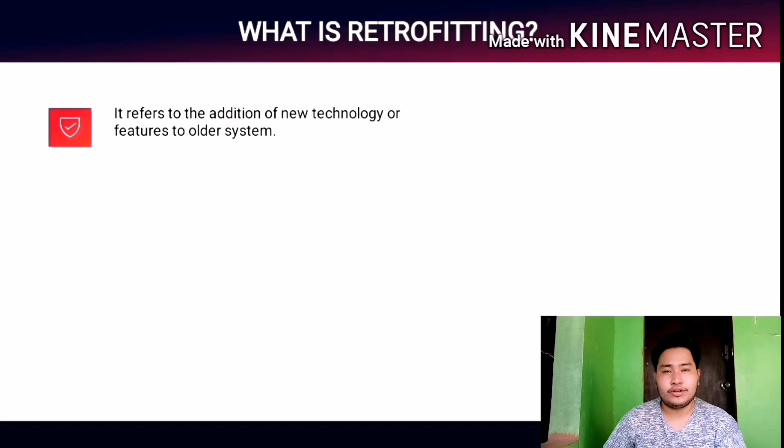Retrofit. Una, what is retrofit? It refers to the addition of new technology or features to older system. Pangalawa, retrofitting is a modification of existing structures to make them more resistant to seismic activity, ground motion, or soil failures due to earthquake.

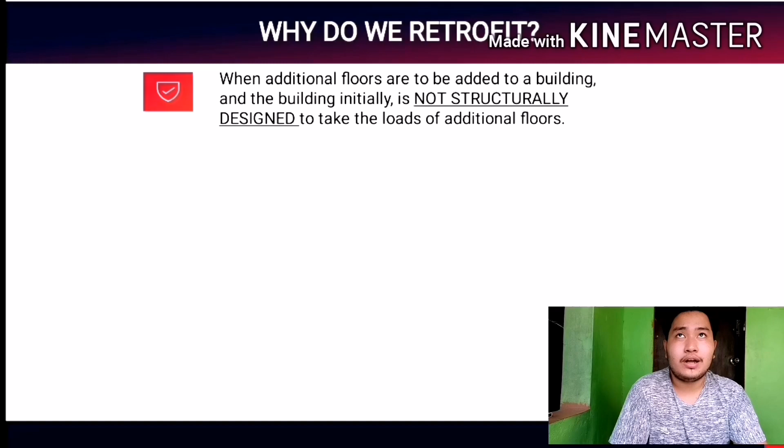Secondly, when the compressive strength of the column and the available reinforcement are not sufficient to carry the loads as per the available code provisions.

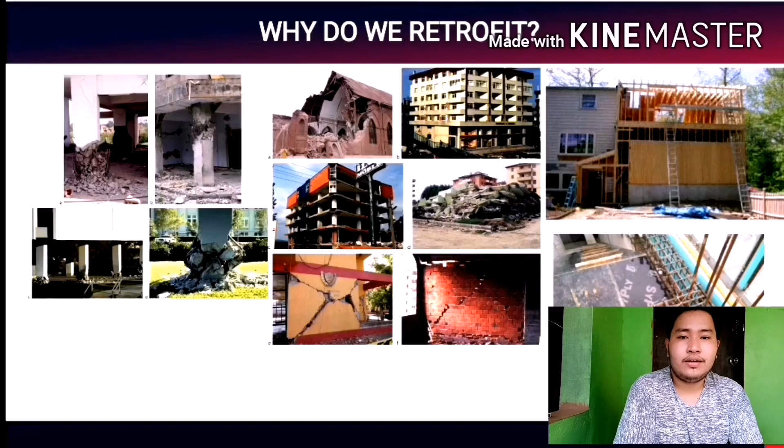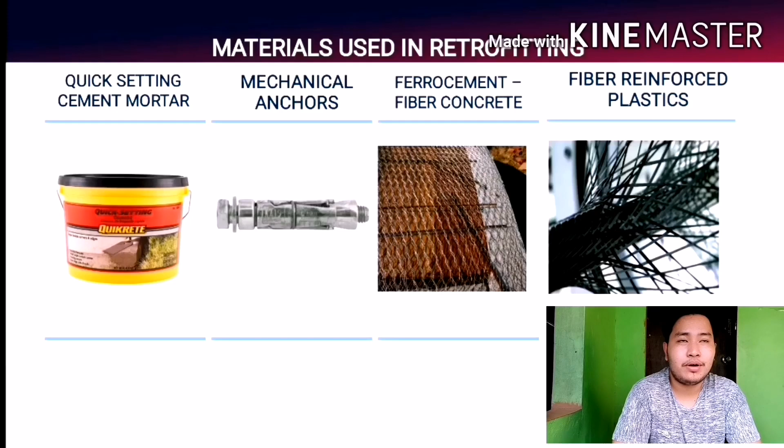Non-shrink grouts, shotcrete, epoxy resins, epoxy mortars, tapos meron din tayong quick setting cement mortar, mechanical anchors, ferrocement, fiber concrete, and fiber reinforced plastics. Yan, ngayon nakita natin yung ating mga materials used sa retrofitting.

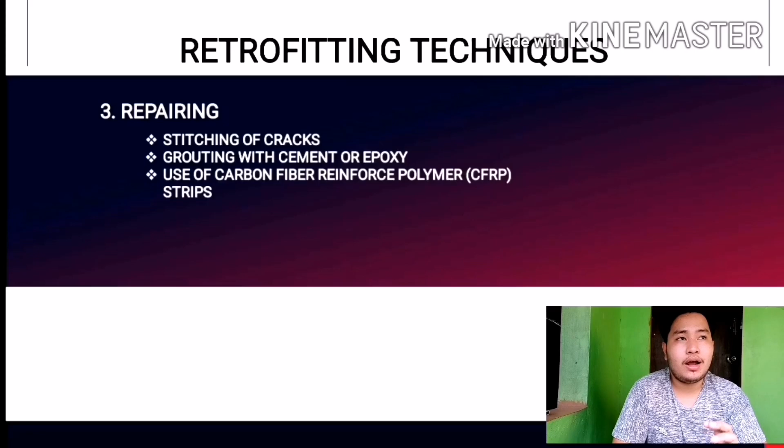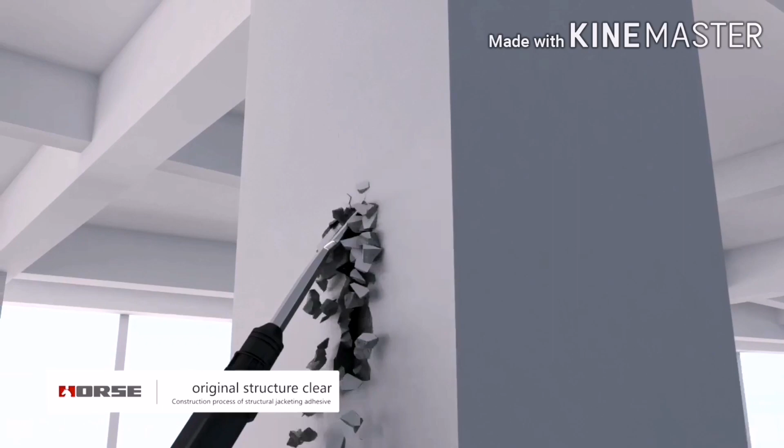Construction process of structural jacketing adhesive. Remove surface coating until concrete surface appears. Make it clear and sound. Grinding surface smooth and chamfer angles. Repair and level concrete defects with Horse repairing adhesive. Locate the setout according to the drawing. Grind and roughen adhering surface of angle bar and batten plate.

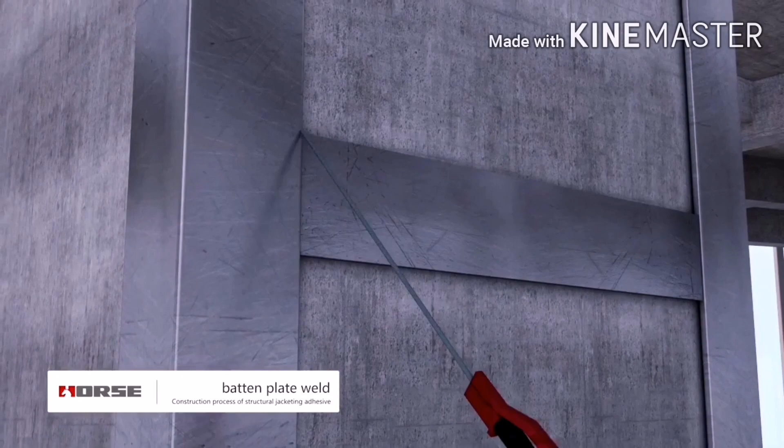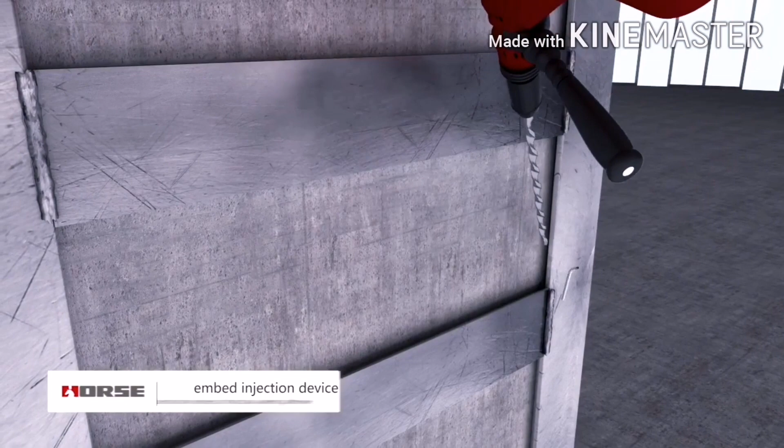Install gasket, clamp steel skeleton with special fixtures. Leave 2 to 3 millimeters gap between steel skeleton and original member. Weld batten plate and steel skeleton. Weld should be straight, uniform, no virtual welding, leakage welding. Embed injection nozzle and exhaust hole according to design. Seal gaps between angle bars and batten plates with Horse crack repair adhesive. After crack repair adhesive is cured, test pressure with air, and if there is leak, seal it in time.

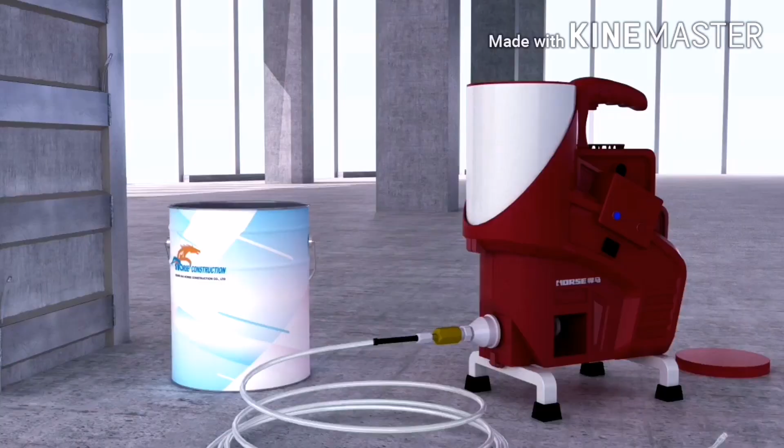Mix the Horse structural perfusion adhesive according to the ratio. Mix and stir evenly. Avoid bubbles. Do not mix too much adhesive at once to avoid waste. Inject Horse perfusion adhesive via injection nozzles with low pressure. Stop injecting when the adhesive appears in the near exhaust hole. Seal the exhaust hole and keep injecting adhesive with low pressure for 10 mins.

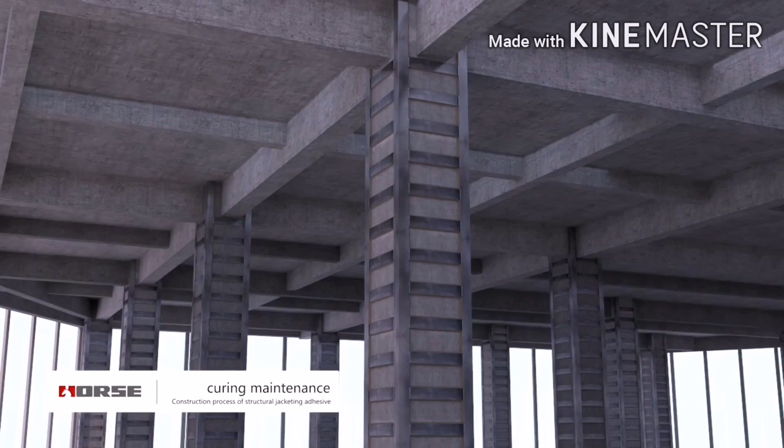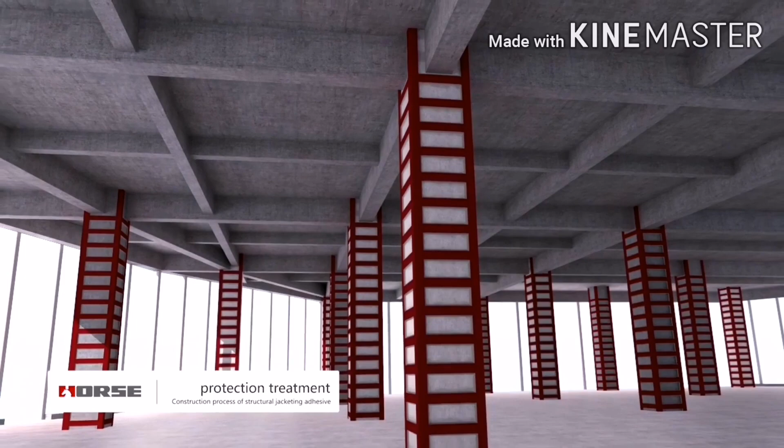After adhesive is cured, remove injection devices and extra adhesive. 72 hours curing and maintenance time is needed after injection construction. Check if there is hollowness after adhesive is cured. Finally, apply anti-corrosion and anti-fire coating. Horse Construction, high-end structural strengthening material specialist.

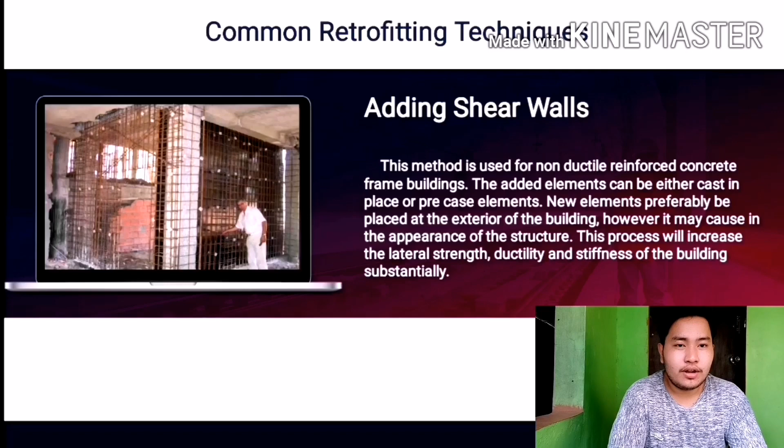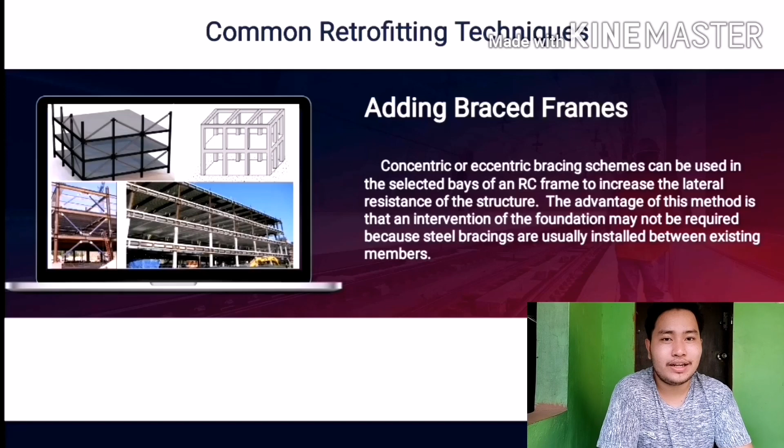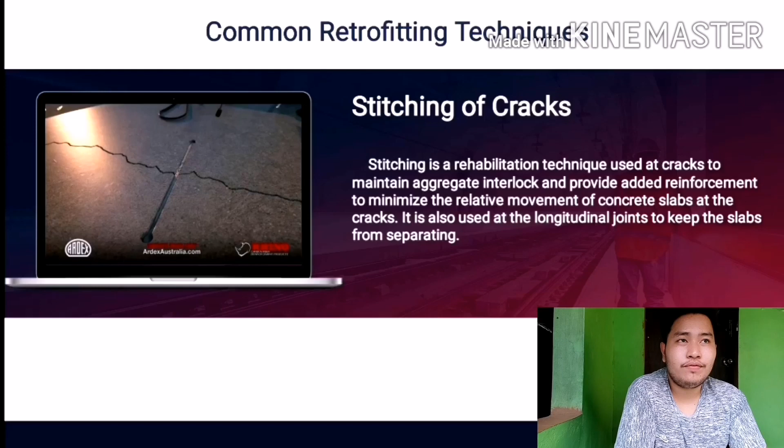Across the surface of the crack, ensuring it's smooth. Center the Rhino carbon fiber concrete crack lock over the crack and trace the outline. Always lay out the concrete crack locks roughly perpendicular to the crack. Vary the angle slightly to reinforce the crack in all directions. Then place the concrete crack locks every 200 to 300 millimeters, tracing the web and marking the ends.

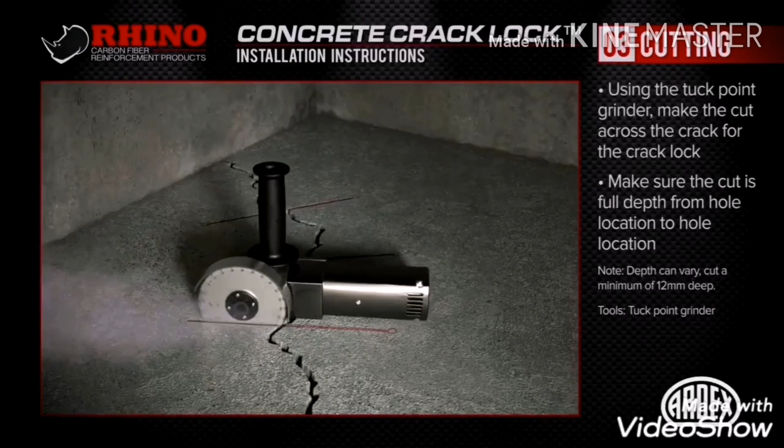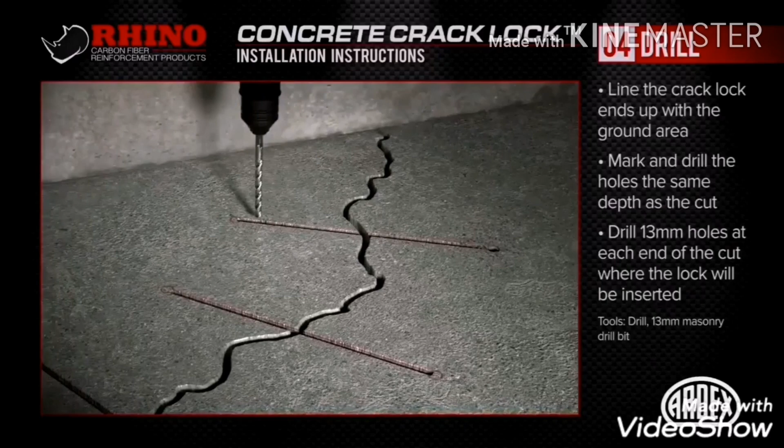Using a suitable tool with a diamond-tipped cutting blade, make the cuts across the crack. While the depth of the cut can vary, be sure to cut a minimum of 12 millimeters deep. Also, be sure the cut is full depth from end to end. Once the cutting is complete, drill holes at the ends with a 13 millimeter masonry bit, ensuring that they're properly spaced to accept the concrete crack locks.

Use an industrial vac or other appropriate method to remove all the loose debris and clean out the area. Also ensure that each concrete crack lock fits properly into each prepared area before applying any epoxy. Fill the cut and holes with one of the Ardex high-strength epoxy resins. Insert into the cut the stronger-than-steel Rhino carbon fiber concrete crack lock. Top off the cut with more epoxy resin until it's even with your concrete surface and scrape away any excess

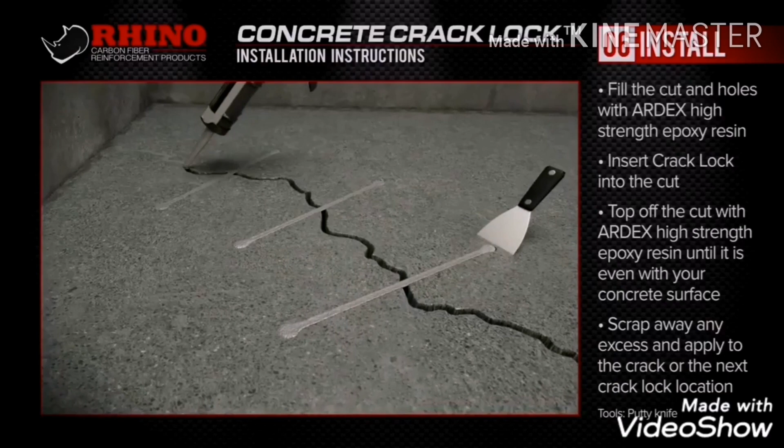epoxy. Apply it elsewhere on the crack or to the next crack lock location. Repeat as necessary. If the epoxy resin settles in the prepared area, you can add more to the cuts. And you can grind excess epoxy with your grinder once it is cured. You can also paint or seal over the repair after everything is dried and been...

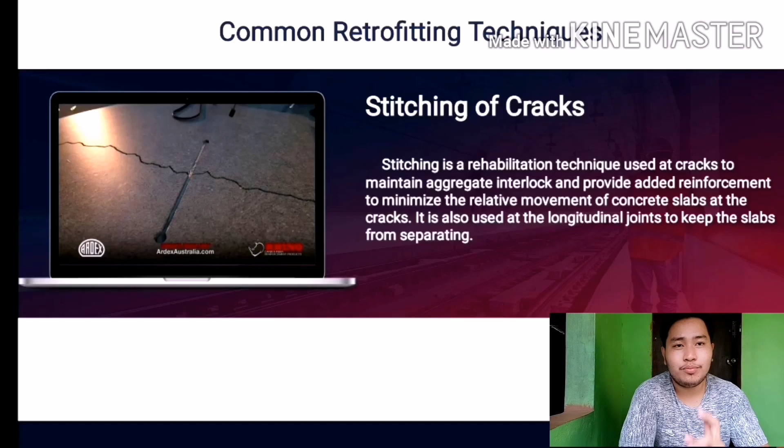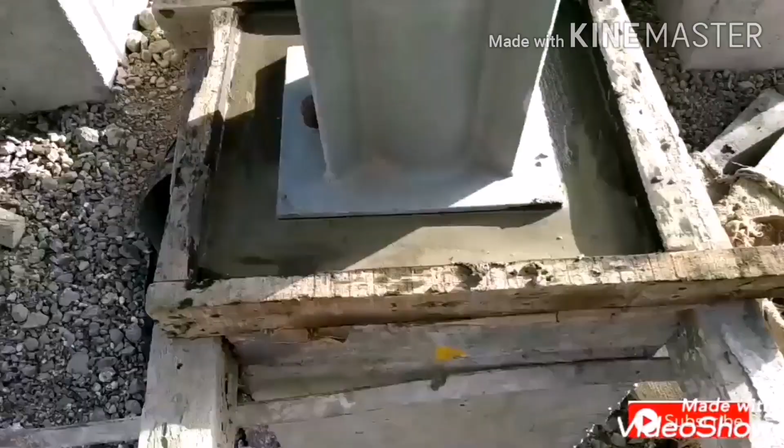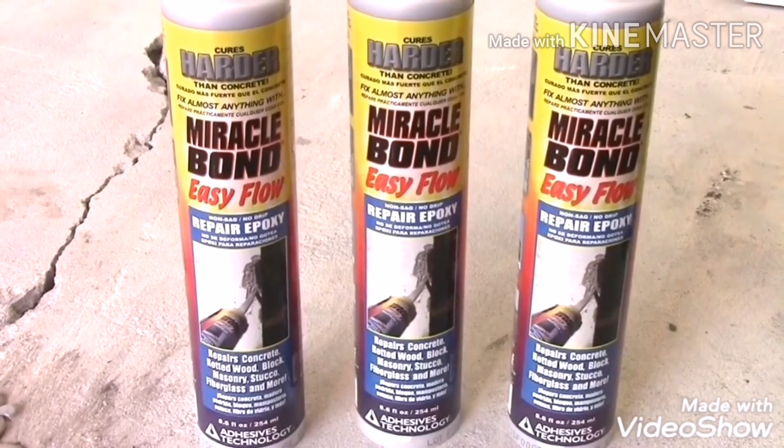Professional crack repairs utilizing structural injection techniques on this cracked concrete slab. Clean the crack using a wire brush. Vigorously clean the concrete surface surrounding the crack so the crack is not plugged with debris. Blow out the crack with compressed air. Miracle Bond would be used to seal the crack on the outside. This is also referred to as capping the crack.

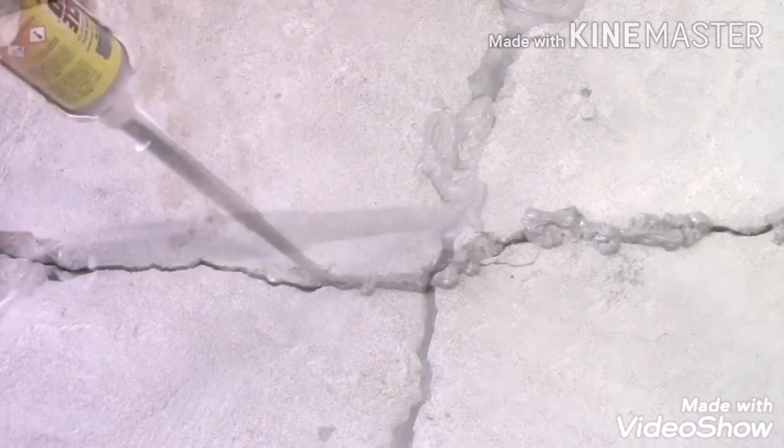Prepare the cartridge according to the label instructions and apply Miracle Bond over the crack, leaving spaces for the port installation. A standard rule of thumb is to place the ports 8 to 10 inches apart. Press the Miracle Bond in and smooth with a putty knife. Miracle Bond should be applied at least 1 to 2 inches wide along the length of the crack.

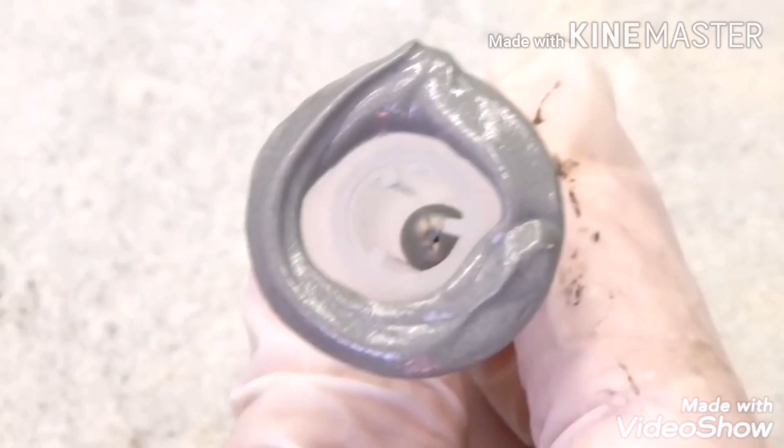Using a plastic putty knife, apply Miracle Bond underneath the outer half of the port base. Ensure that the port passageway is not obstructed or blocked when applying the epoxy. Center the port over the crack face in each gap and attach. Be sure to seal any pinholes or voids between the ports and the substrate being injected.

Allow Miracle Bond to fully cure prior to starting the injection. Keep in mind that epoxy cure rate is dependent on temperature. Attach the opposite end of the tubing tightly over the tip of the first port that needs to be injected. The flow clip should always be closed and only open while dispensing material. Start with the lowest port when injecting vertical cracks, or the widest part of the crack when injecting horizontal cracks.

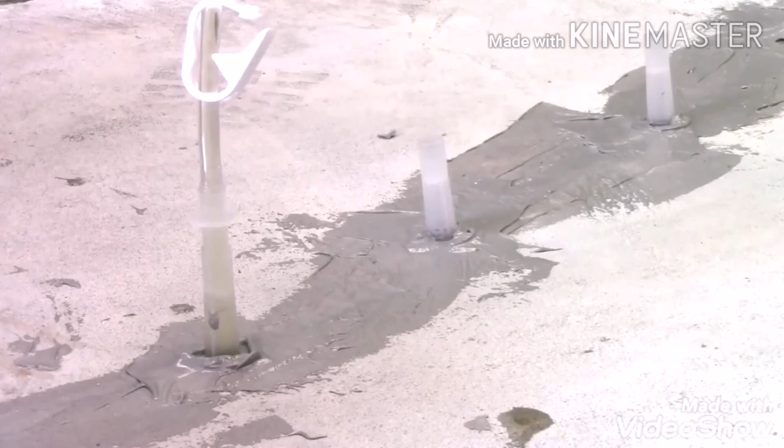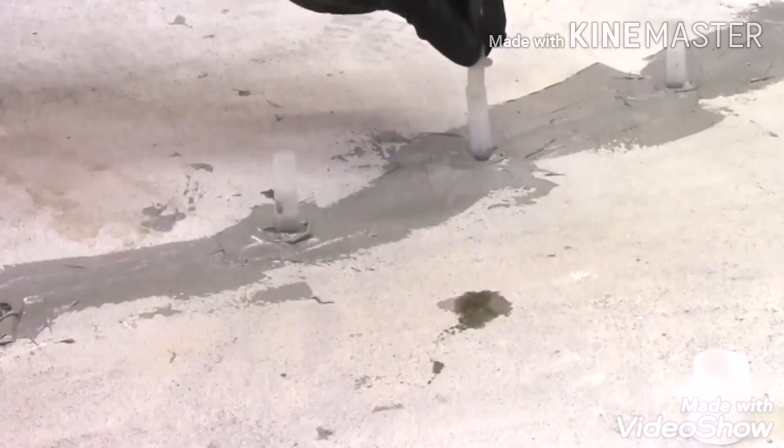Inject until epoxy reaches the next port. Remove the tubing adapter from the port and attach to the second port. Use the cap to plug the port. Begin injection at the second port and inject until the epoxy reaches the third port. Repeat until finished. After curing is complete, remove the ports with a hammer.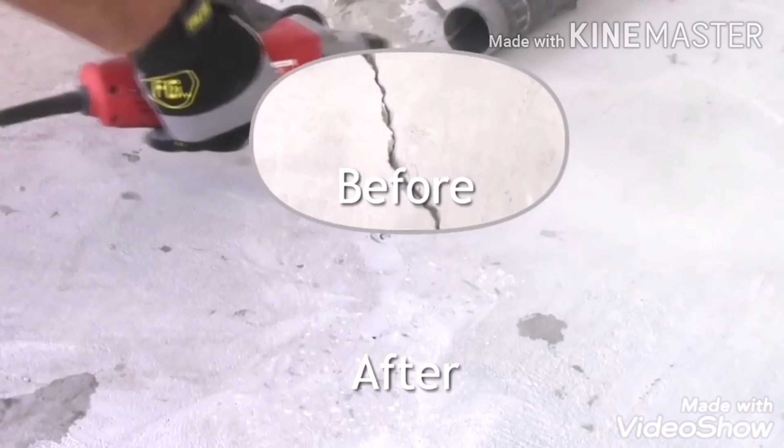For a more finished look, the epoxy cap can be ground smooth. Finish by smoothing out the Miracle Bond capping material using a grinder. You'll notice that the crack is barely visible. By using this crack kit and following these steps, you'll achieve results just like the professionals.

Carbon constitutes the fiber phase of this type of composite material. This is a high-performance polymer and it contains 93 to 95% carbon. Each fiber is 5 to 10 microns in diameter and this is twice as stiff as steel and 5 times as strong as steel. This polymer is high in tensile strength, lightweight, very low thermal conductivity, fire resistant, corrosion resistant, and non-magnetic. CFRP wraps are mainly used for corrosion control and retrofitting for reinforced concrete members.

In circular columns, it will increase the axial capacity, load-bearing strength, and compressive strength of the concrete.

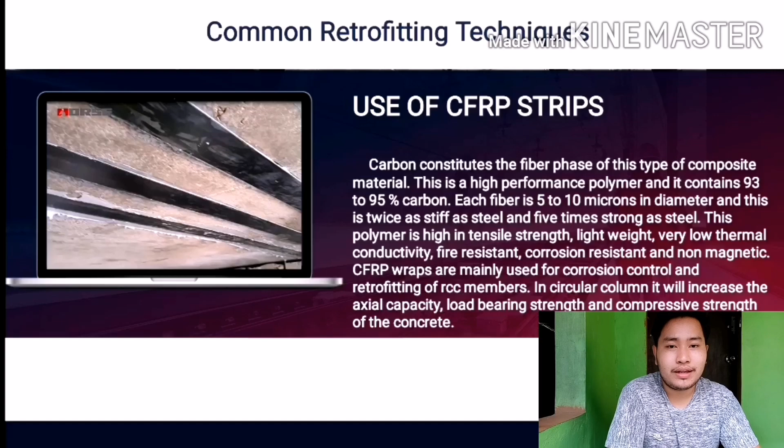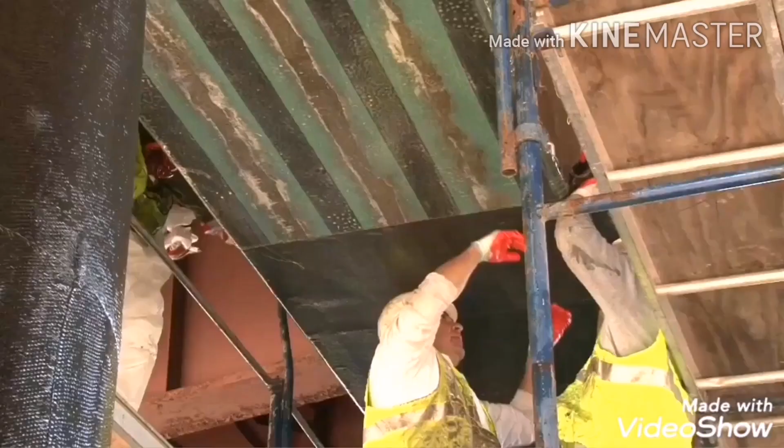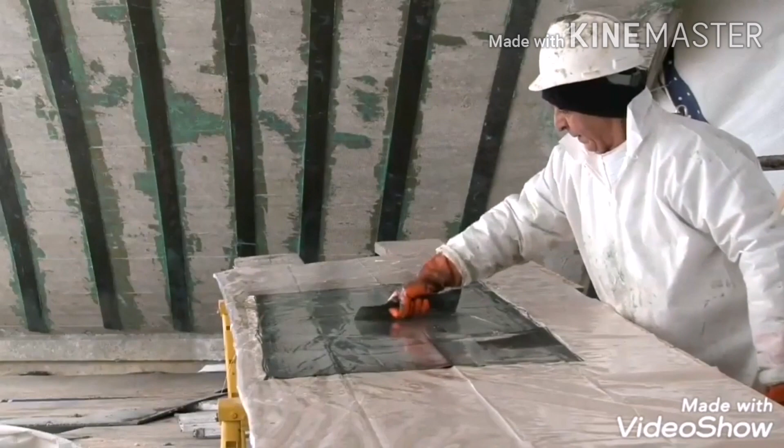With the aging transportation infrastructure in the Northeast, the structural integrity of hundreds of concrete bridges has been badly compromised and need immediate repair. Carbon Wrap Solutions of Tucson, Arizona provides innovative products and turnkey engineering solutions as an effective and economical alternative for the repair and retrofit of bridges using fiber-reinforced polymers. Carbon Wrap's fiber-reinforced polymers come in the form of woven or stitched fabric that is saturated on premise and bonded to a substrate using a specially formulated structural epoxy.

The fiber resin composite also comes in the form of pre-cured laminates for application to surfaces that are smooth and can handle the relatively rigid cured laminate. These polymers, with correct application, increase the ductility and strength of concrete structures, making them last longer at a fraction of the time and cost of using conventional materials and techniques.

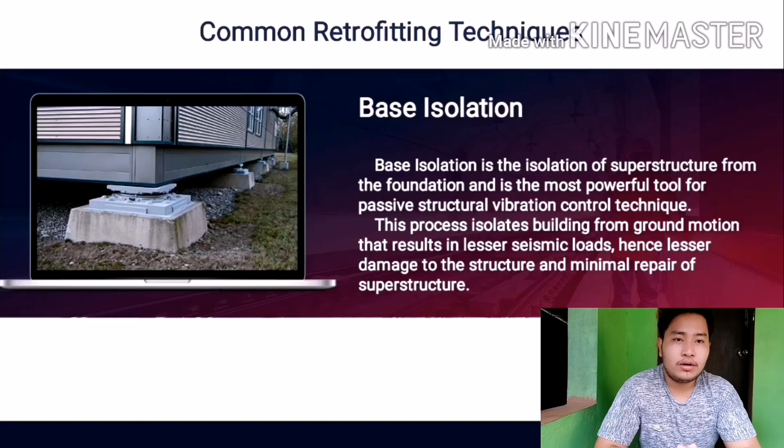And now let's move on to the next part of our vlog.